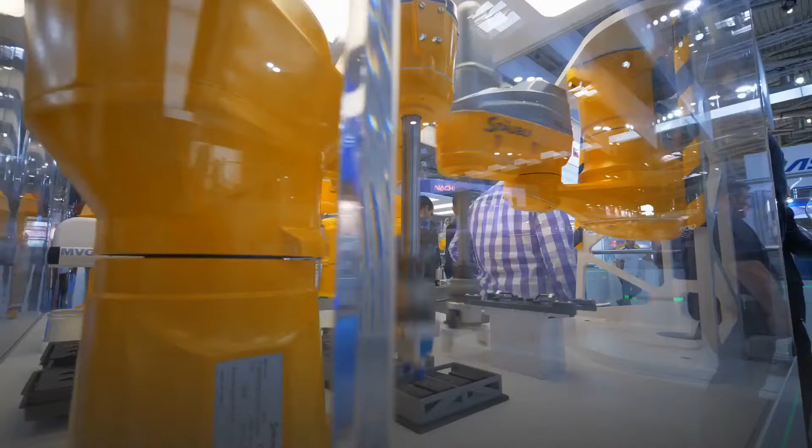In this video, we are going to talk about the future of automated construction.

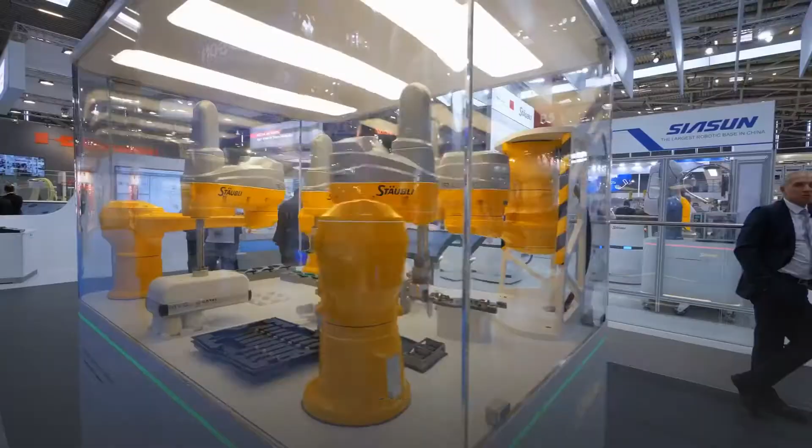Borja Garcia de Soto, Assistant Professor of Civil and Urban Engineering at NYU Abu Dhabi and Director of the S.M.A.R.T. Construction Research Group, says that where we are with construction robotics doesn't have a simple response. According to Dr. Maja Matarić, author of the Robotics Primer, robots are an autonomous machine that exists in the physical world, can sense its environment, and can act on it to achieve certain goals.

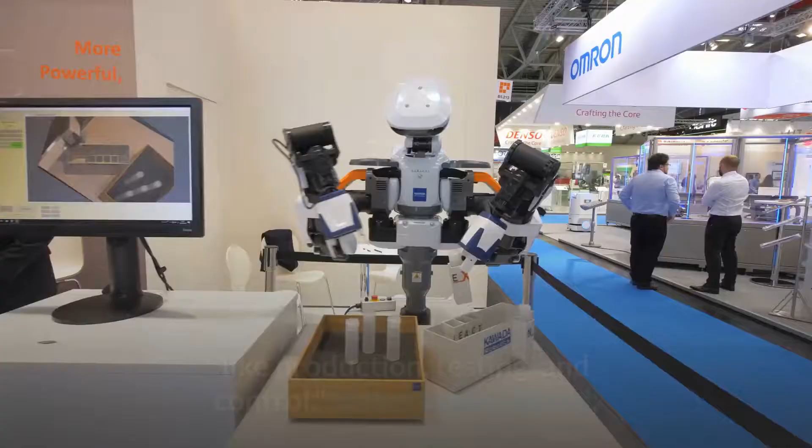The construction industry still struggles to pass the prototype and testing stages. The use of single-task robots, STR, in the construction industry, on the other hand, has been on the rise for some time. Robots are now widely used in processes like production, testing, and control, states Mark Ireland, Chief Engineer, Technology Strategy, for the Manufacturing Technology Center, MTC.

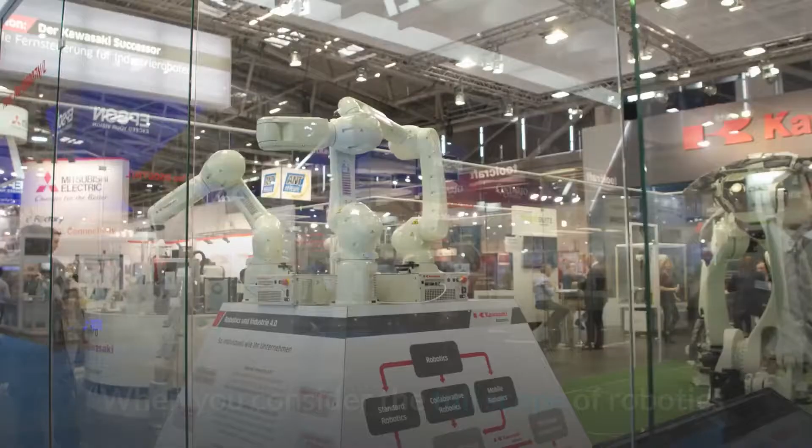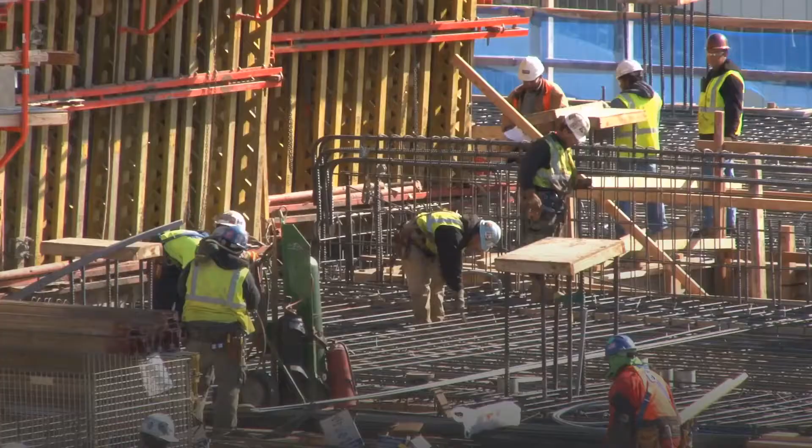When you consider the full scope of robotics and automation, there is a lot of work being done right now, especially in the areas of design automation and the use of industrial automation in the off-site manufacturing of sub-assemblies. There is also a lot of work being done in the infrastructure field on robotics and automation, which will aid in the completion of complex, time-consuming activities that would otherwise have to be performed manually. This includes everything from surveying drones to pipe inspection drones to underwater inspection drones.

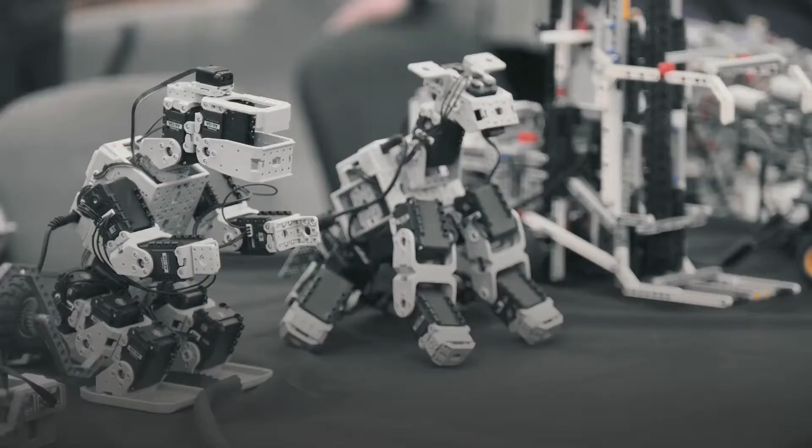Various concepts, designs, and early implementations continue to show how robots can help with building. The position of robots in construction is expected to expand as researchers, academics, and technology companies continue to push the boundaries. For decades, the manufacturing industry has used robotic automation extensively.

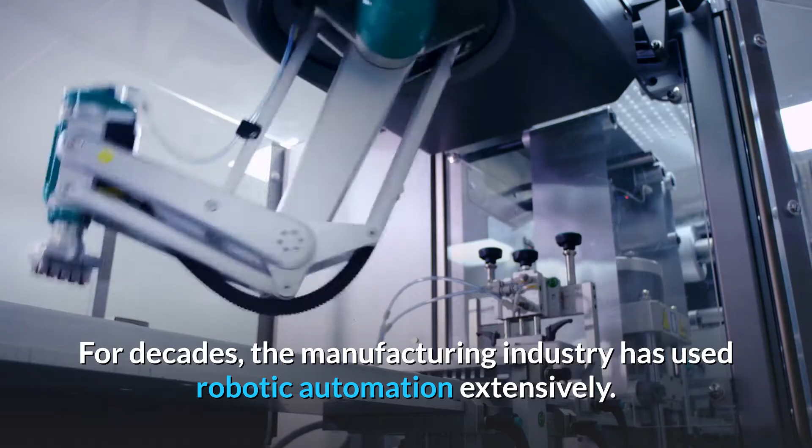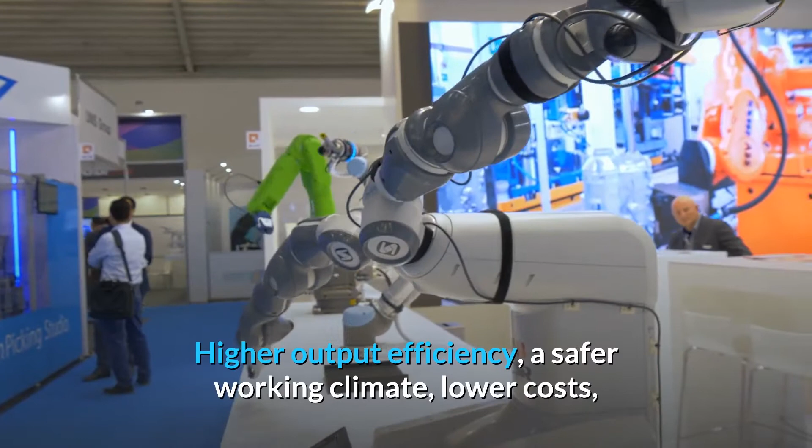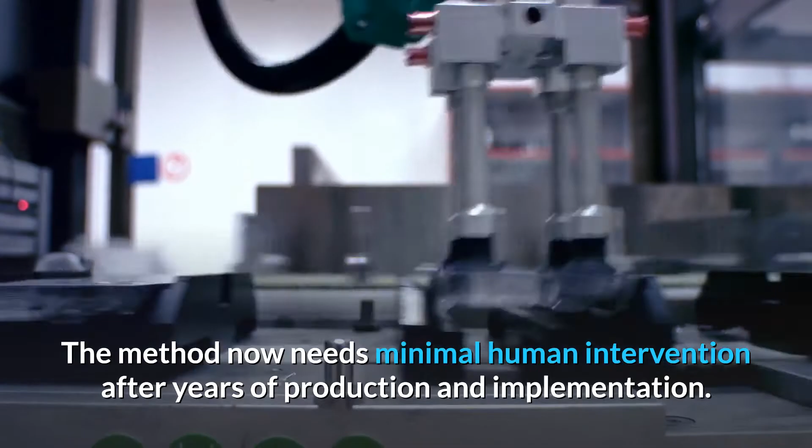The majority of automobiles, consumer electronics, and even domestic robots were designed and assembled by armies of robots with little human oversight. Higher output efficiency, a safer working climate, lower costs, and better quality are all benefits of robotic automation. The method now needs minimal human intervention after years of production and implementation. Let's start. Midway on the journey from manual construction to full automation.

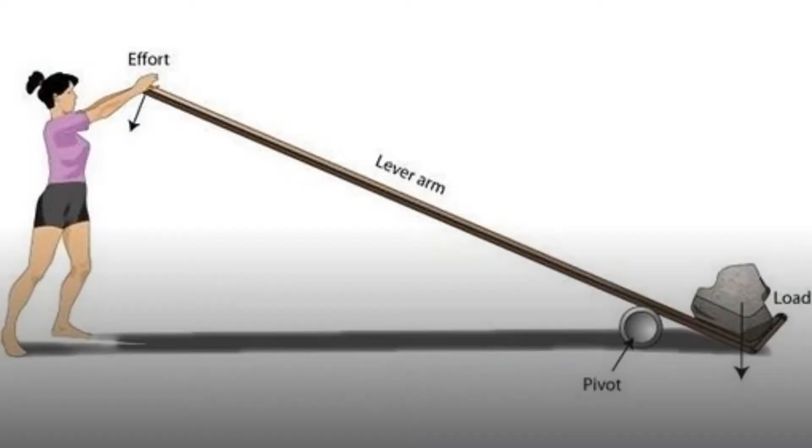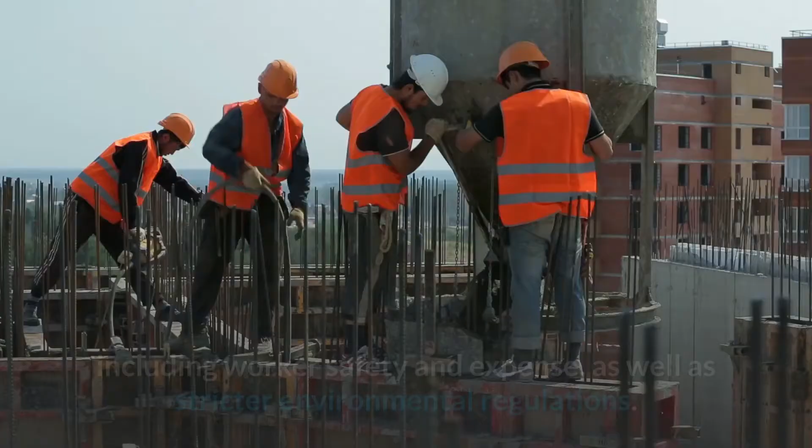Ancient Egyptian temples and pyramids continue to fascinate, not just because of their sheer scale, but also because of the techniques used to construct them. To assist construction, simple devices such as the ramp and the lever were invented. The mode of construction hasn't changed much over thousands of years. It remains a labor-intensive industry, aided by non-automated devices that are much more sophisticated and powerful than those of the past.

The construction industry is confronted with a number of issues, including worker safety and expense, as well as stricter environmental regulations. An aging population has resulted in fewer workers and more workplace accidents around the world. As a result, more funds are needed to pay increased wages, insurance costs, and workplace safety training and equipment.

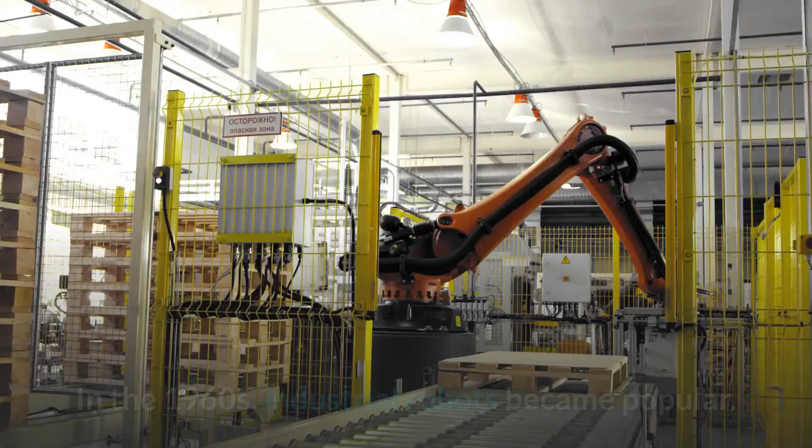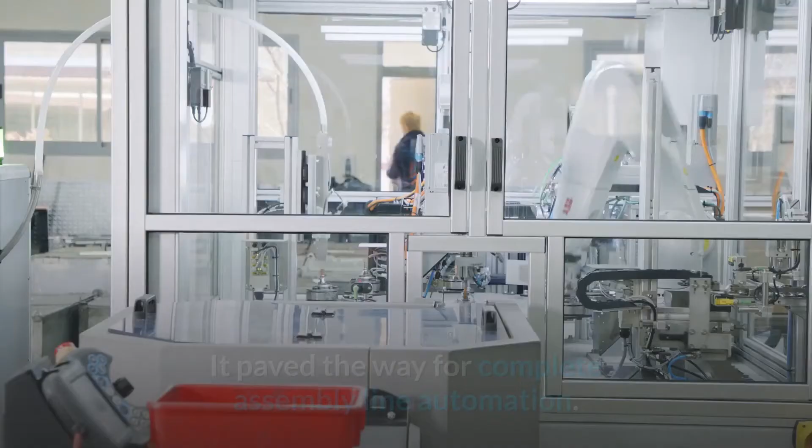In the 1960s, industrial robots became popular. The Unimate robotic manipulator, which has 6 degrees of freedom and can handle items weighing up to 500 pounds, has been unveiled. It paved the way for complete assembly line automation. Over the last 2 decades, the number of industrial robots in use has increased threefold to 2.25 million. From 1993 to 2016, robotics investment accounted for 10% of OECD countries' GDP growth per capita.

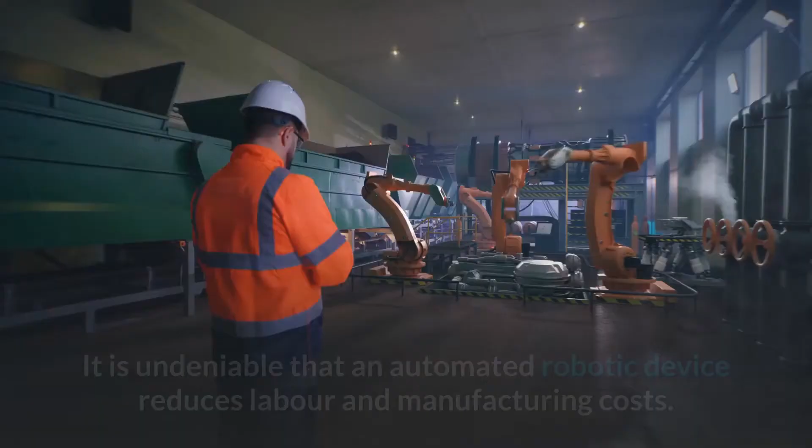Despite the apparent advantages, the building industry has been slow to adopt automation. It is undeniable that an automated robotic device reduces labor and manufacturing costs. According to a McKinsey report, manufacturing labor compensation in the United States is 4 times the average robot price. However, financial gain is insufficient to propel the building industry forward. There are plenty more challenges to overcome.

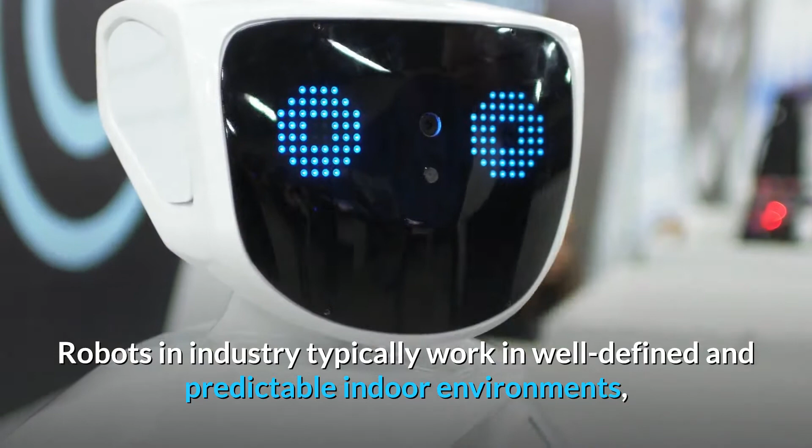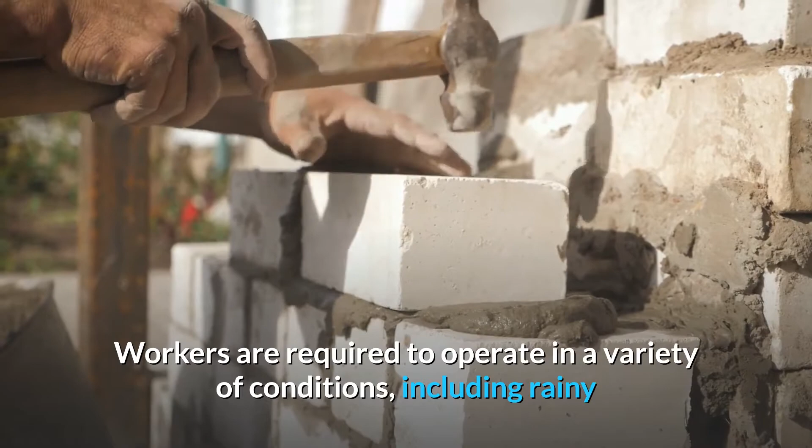Robots in industry typically work in well-defined and predictable indoor environments, confined to a fixed assembly line or working space to complete assigned tasks. It's a whole different story in the building industry. Construction sites are rife with surprises and ambiguity. Workers are required to operate in a variety of conditions, including rainy and dry, hot and cold, sandy and watery, and open and confined spaces.

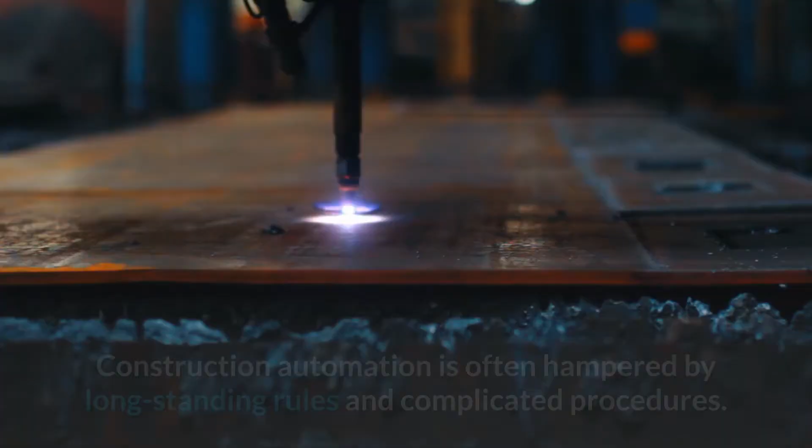The building robot inventors face enormous technical challenges. Making a robot that can do it all and adjust to these varying operating conditions would be prohibitively expensive. Construction automation is often hampered by long-standing rules and complicated procedures. There are complex and often harsh laws in place to ensure the quality and safety of construction work.

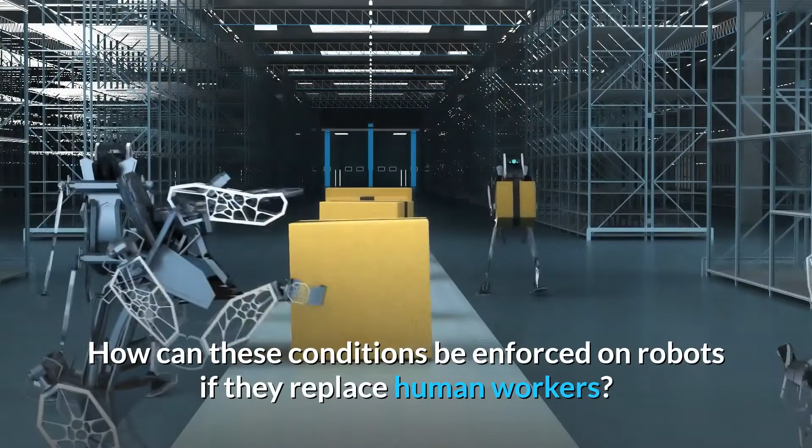The legal obligation of employees specified in contracts, as well as professional certification tests, include safety guarantees. How can these conditions be enforced on robots if they replace human workers? Who will be held liable for any faulty work or accidents? In the field of architecture, there is a notable chasm in robotics ethics.

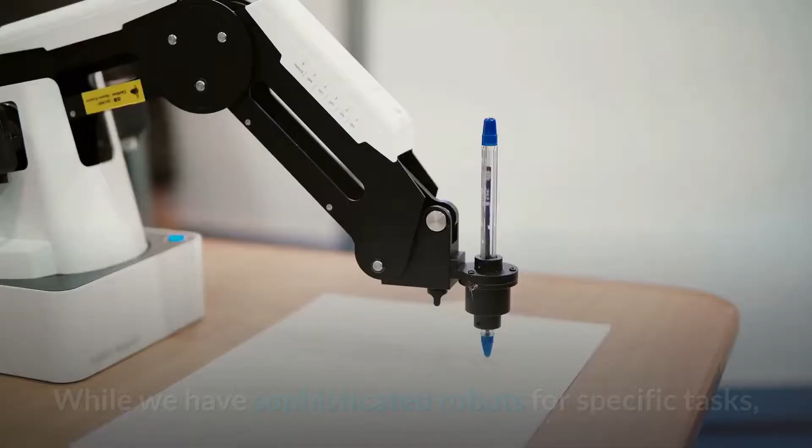Robotic technology adoption is often limited by the difficulty of construction tasks. Hundreds of activities and stages are normally included in a building project. While we have sophisticated robots for specific tasks, we have yet to develop a fully automated management system. It's like having a star-studded football team without a professional boss.

The implementation of such a system necessitates a thorough understanding of construction management and process flow, but there are few studies and scientific models available. Many individual activities on construction sites could be automated over the next 10 to 20 years. However, there is still a long way to go before full automation is achieved.

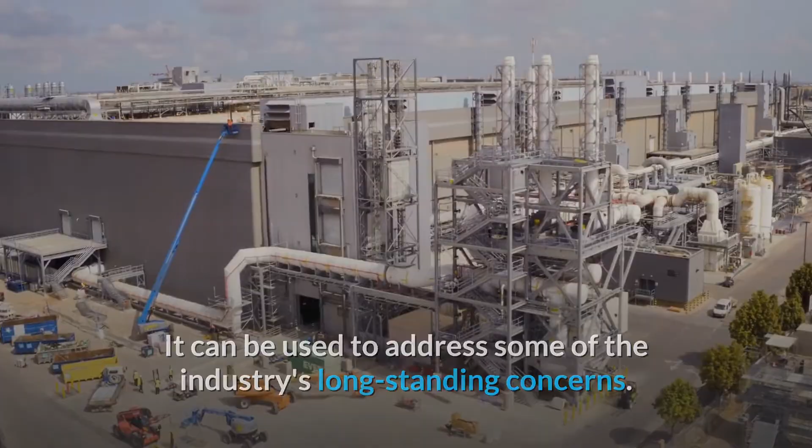Advantages of introducing robotics and automation into the construction industry. Robotic technology is still a topic of discussion in discussions about the future of building and architecture. It can be used to address some of the industry's long-standing concerns. During the 1980s, robotics technology advanced quickly, especially in Japan, to address labor shortages caused by an aging workforce and younger workers' aversion to hard physical labor.

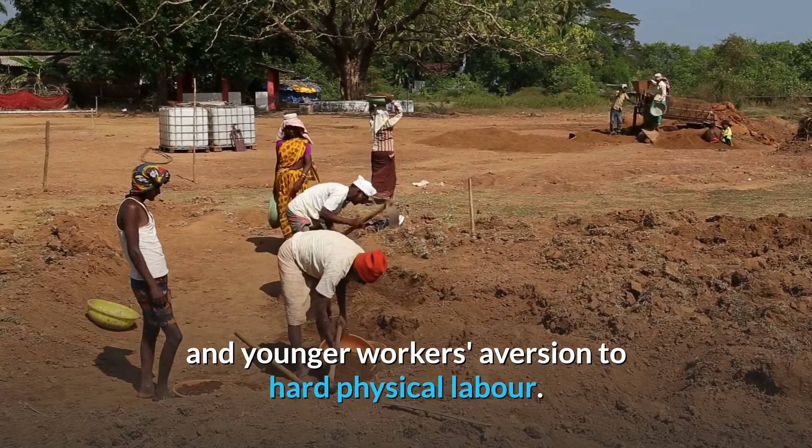Every developed country and area is now dealing with the issue of aging. The median age of construction workers in the United States increased from 37.9 in 2000 to 40.4 in 2010. Since older workers' injuries are more serious, compensation rates rise with their age. Over the course of a 45-year career, a construction worker has a 75% risk of suffering a crippling injury and a 1 in 200 chance of dying on the job.

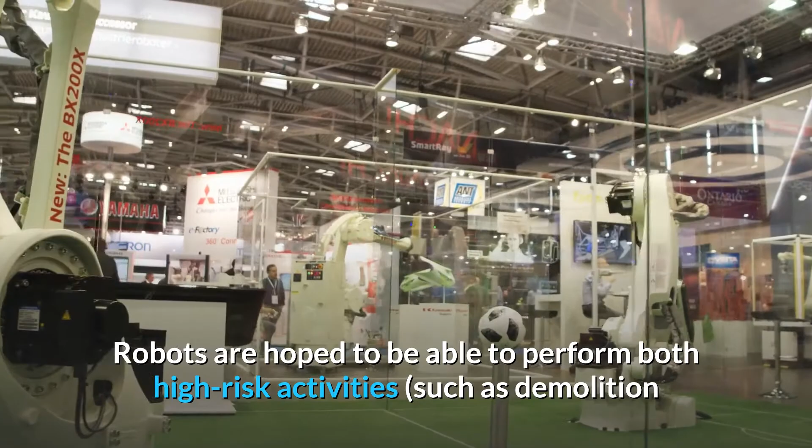Robots are hoped to be able to perform both high-risk activities, such as demolition and working at heights, as well as fill labor shortages in particular professional tasks. Robots are more appealing than human workers in the future because they can work around the clock and without errors. Humans aren't robots. Fatigue is an inherent weakness, and as a result, errors and inconsistent quality are common in their work. Robots, on the other hand, are not fatigued and can perform the same task with high precision and accuracy.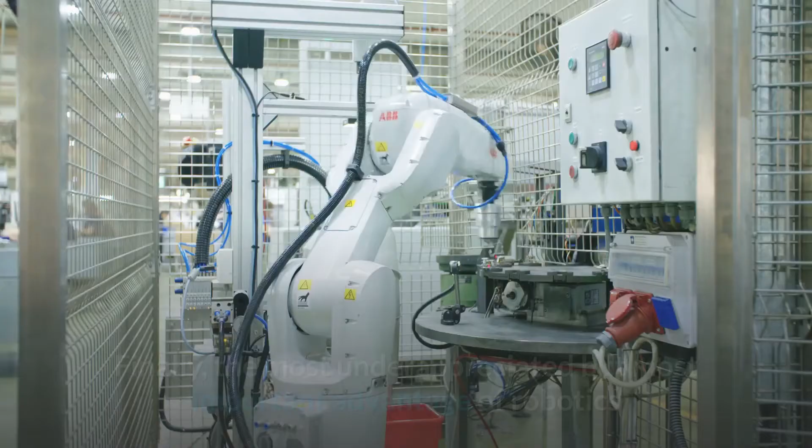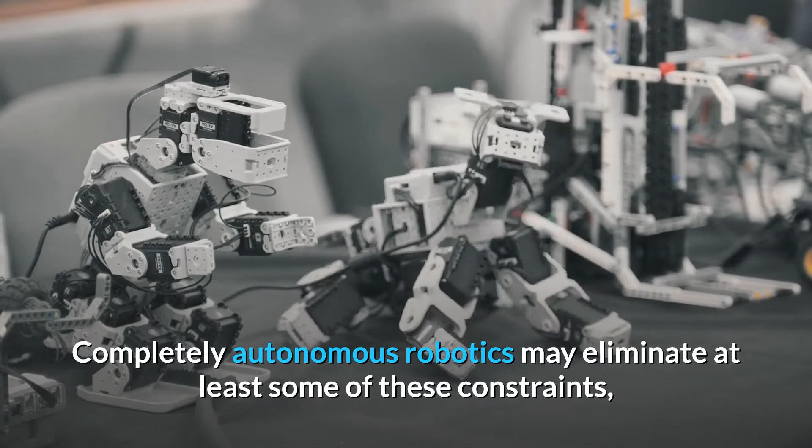Finally, the most underappreciated but most important advantage of robotics and automation in construction is the expansion of design options. Architects have a limitless supply of design proposals, but in the real world, considerations such as worker methods, time, and construction costs must be considered, all of which obstruct the realization of imaginative concepts. Completely autonomous robotics may eliminate at least some of these constraints, allowing for the construction of more complex, artistic structures in the future. Construction robots can revolutionize the future of the building industry.

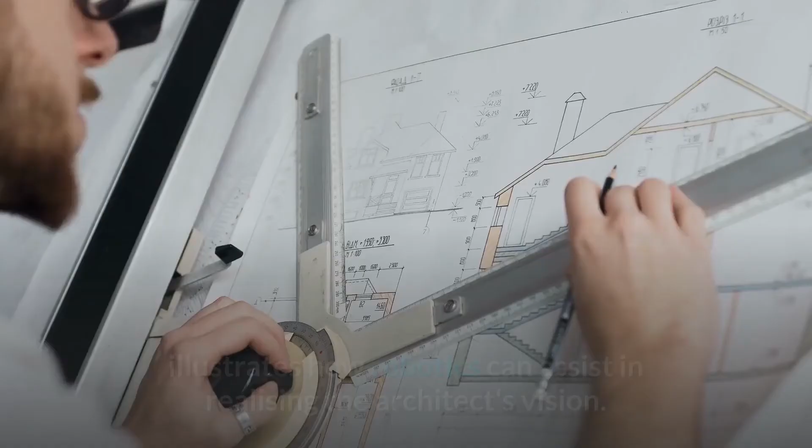The research team from the Faculty of Engineering and Professor Adam Fingrut from the School of Architecture at the Chinese University of Hong Kong, CUHK, introduced CU-Brick, a cable-driven robot that builds with Jenga blocks, at the Hong Kong Bi-City Biennale of Urbanism, Architecture 2017. The Jenga blocks had to be positioned precisely at assigned locations with a very limited margin of error due to the irregular layout of the buildings. With the idea that creation possibilities are infinite, this project illustrates how robotics can assist in realizing the architect's vision.

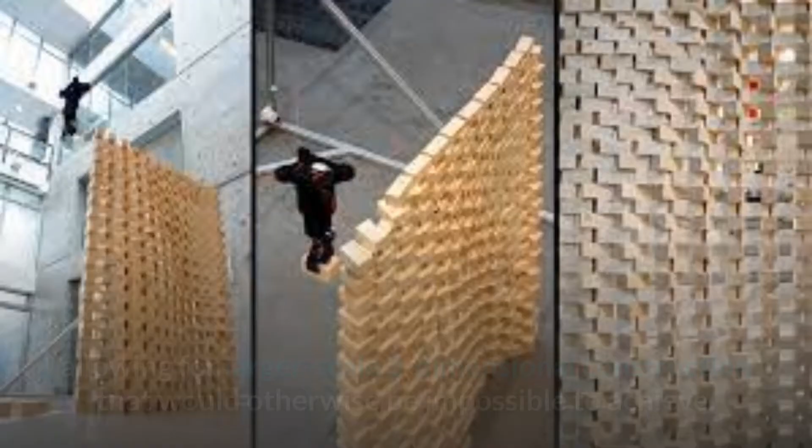The CU-Brick robot is compact, allowing the system's actuators to be installed on metal frameworks to the walls and roofs of buildings in a variety of settings, allowing for larger-scale three-dimensional construction that would otherwise be impossible to achieve. The machine software calculates and monitors the cable pulling, allowing the gripper to move accurately and position bricks.

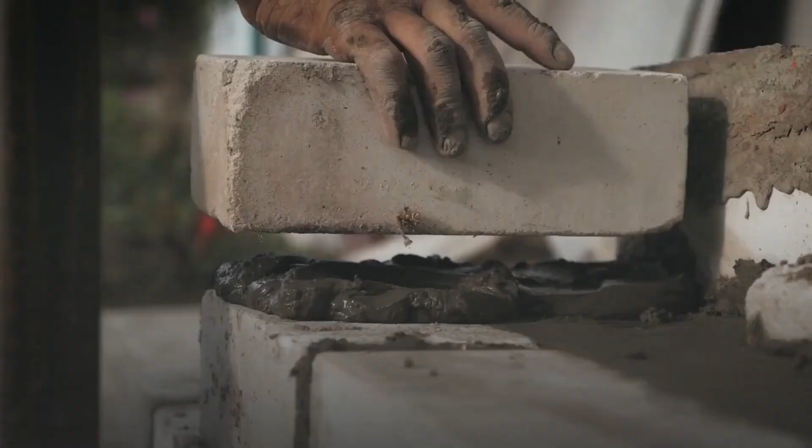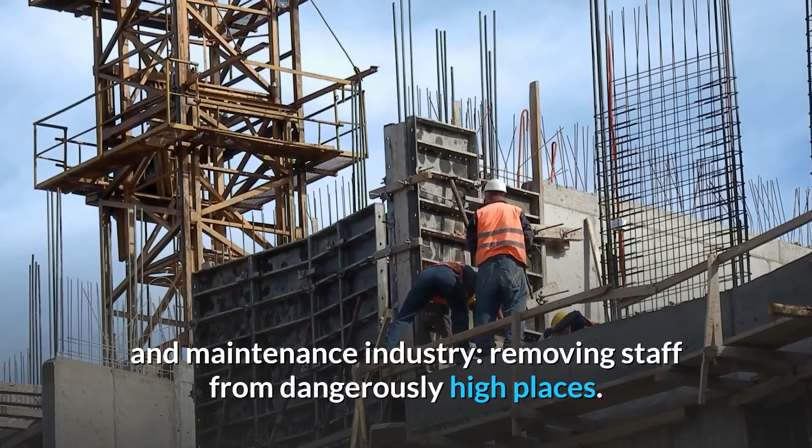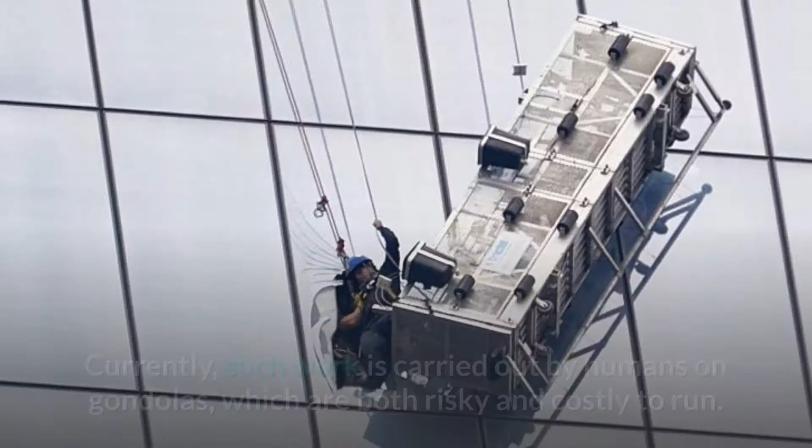Our team is currently working on another building construction-related project, developing a high-rise facade operations robot. Rather than being a device that expands the range of possibilities for new brick structure designs, the facade robot seeks to solve a major problem in the building construction and maintenance industry, removing staff from dangerously high places. The device is designed to handle a variety of tasks, including window washing, facade decoration, and maintenance work. Currently, such work is carried out by humans on gondolas, which are both risky and costly to run.

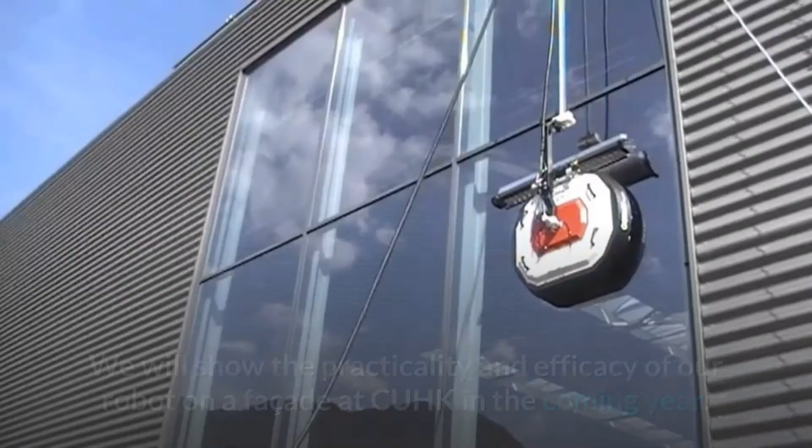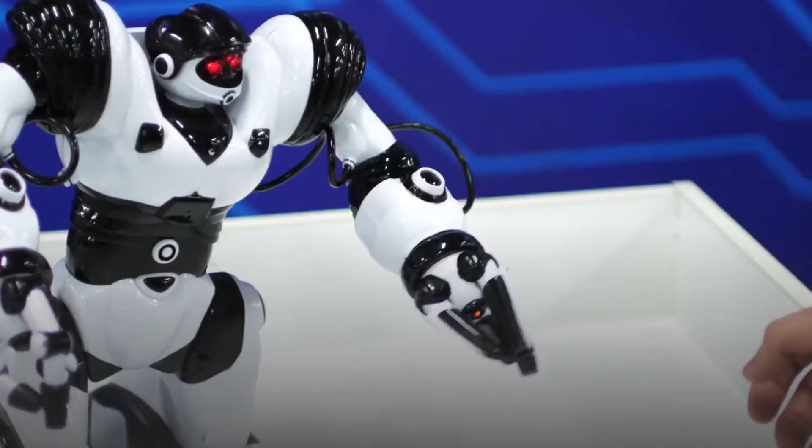As a result, we are not developing robots to replace human jobs, but rather to provide them with a safer working environment. We will show the practicality and efficacy of our robot on a facade at CUHK in the coming year. Thanks to an aging population, the industry has started to acknowledge the need for more exposure to automation robotics. Companies are constantly pursuing collaborations and opportunities to commercialize robotic technologies and adapt them to the workplace, which will further speed up automation within the industry, thanks to good research work undertaken by research institutes and the help of governmental bodies.